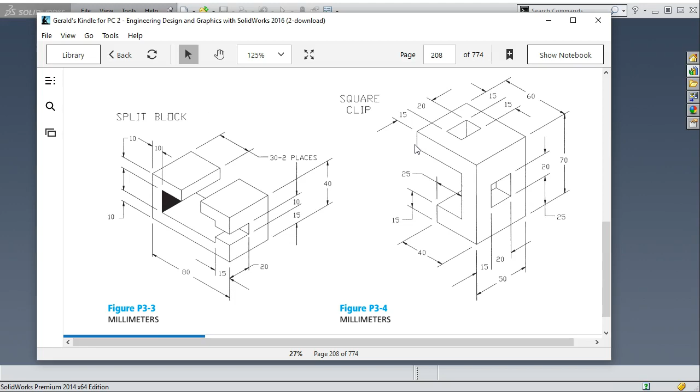So the thing with the thin features, we just want to make sure that we're consistent because we're not going to be able to change these wall thicknesses. If I need a wall to have a different dimension, then I'm going to have to draw that whole profile. Kind of the same with the offset if we were closing that in.

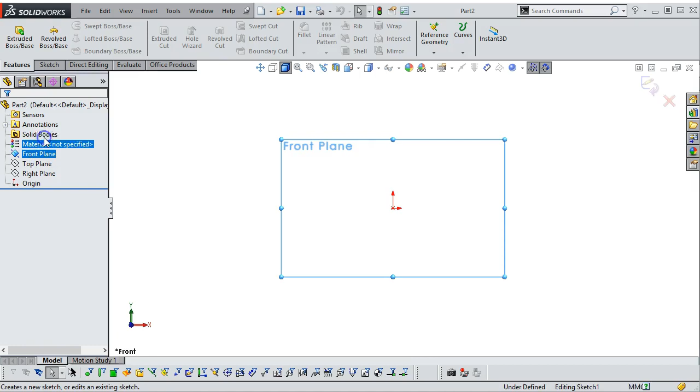All right, so this one's in millimeters, kind of hoping that we would have a mix of inch and millimeter. So this one can be back in the front plane. And then my sketch up and over.

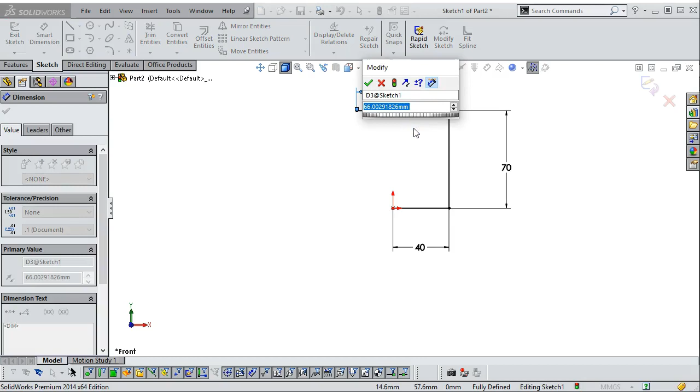So we have 40 millimeters on the lower leg, 70 millimeters on the height, and then 60 millimeters on the overall. We're going to extrude, and thickness, actually the width of the part is 50 millimeters.

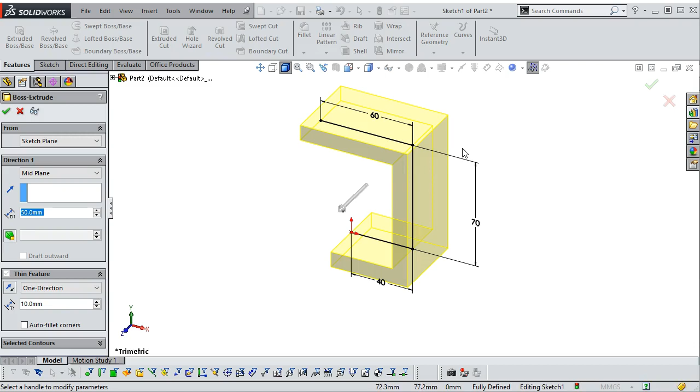And since we're doing end conditions, let's go with a mid-plane end condition. That will put 25 millimeters forward of the front plane and 25 millimeters to the rear of the front plane.

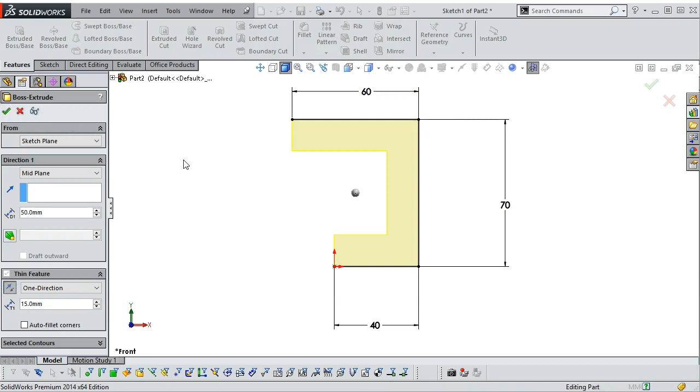Alright, and then 15 millimeters on the thickness, and we need to make sure it's going the right way, so this is growing outwards. That means I need to toggle my direction so that it makes the cut to the interior. We'll go ahead and hit OK.

And then sketch. Alright, so 25 and 20, half of 20 would be 35. And 15 and 10 would be 25, so that says that this is going to be centered. So I'm going to do a Control 8 normal to.

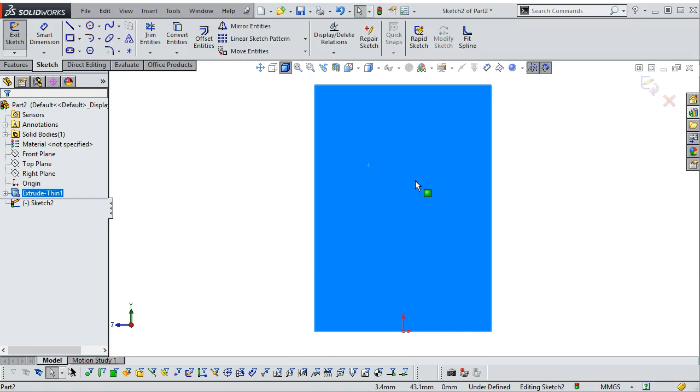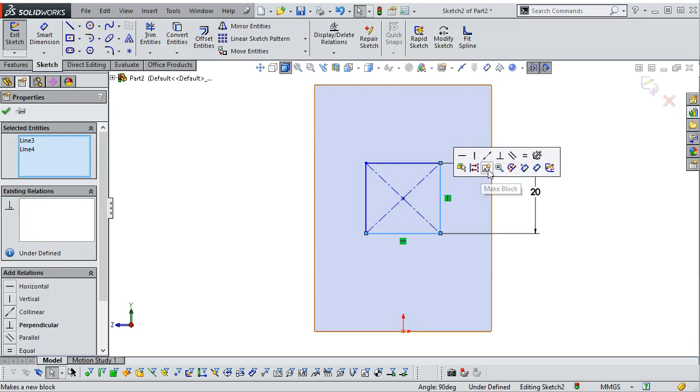We're in the sketch, and we have the center rectangle, and the rectangle is 20 by 20. Alright, and then if my design intent is that this rectangle will always be 20 by 20, then I'm going to set those to equal.

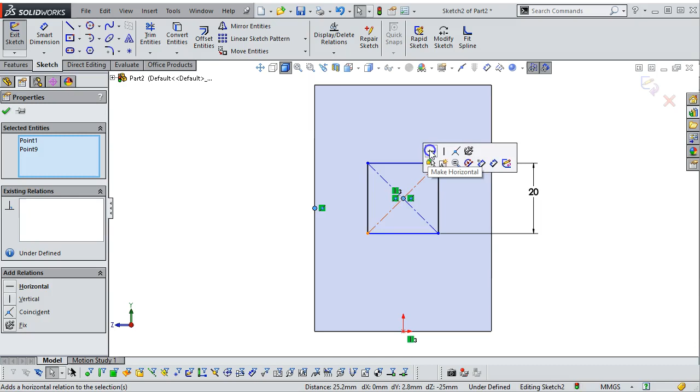Since I have the origin, one of the advantages of setting the midplane is that I can pick the origin and the center point of my center rectangle, and the origin are vertical. And then selecting the midpoint along one of the edges, and the center point of the rectangle can be horizontal.

And then we will extrude cut. This one, there's nothing to terminate, so through all. The top may just miss, but it'll be something that we want to verify.

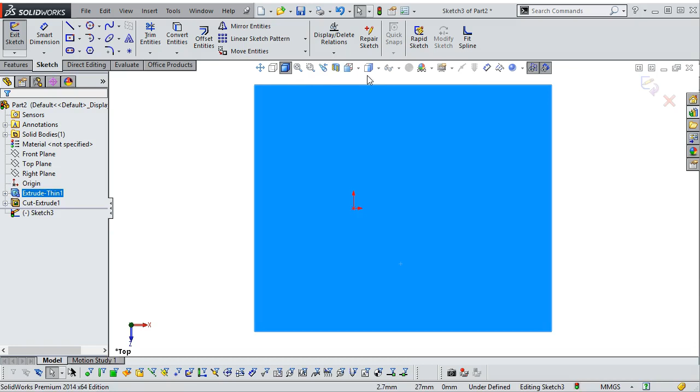All right, so if we go back to our views and go to the hidden lines visible, I think I'll stay with the center rectangle. And we do have a dimension, but 15 and 20 and 20 by 15 for our length, so we can't use the equal for the sides.

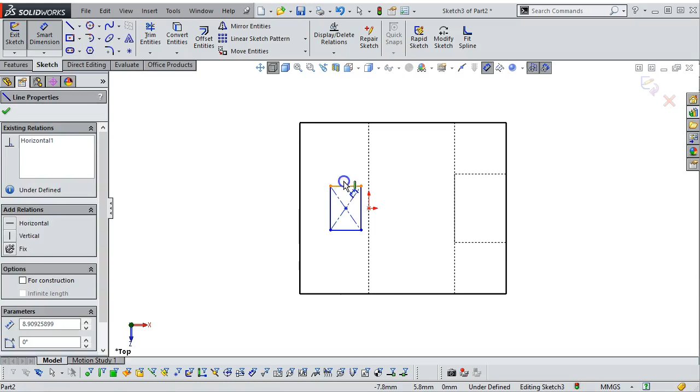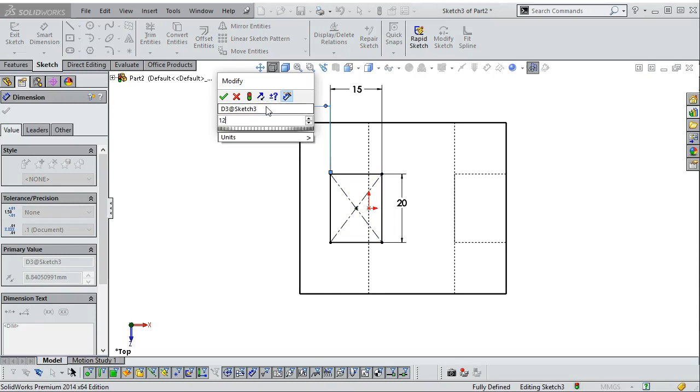But I can still use the origin and the center of my rectangle for horizontal, and then all I have to do is position it along that face. Alright, so that has a distance of 15. Alright, and doing that, it's not quite.

We have just a little bit of a gap, and would be interested in seeing that. Let's see, 40 back from 60 should be 20. That doesn't quite look like 5 millimeters, but oh, that would be it. 15. Okay, so we still have overlap.

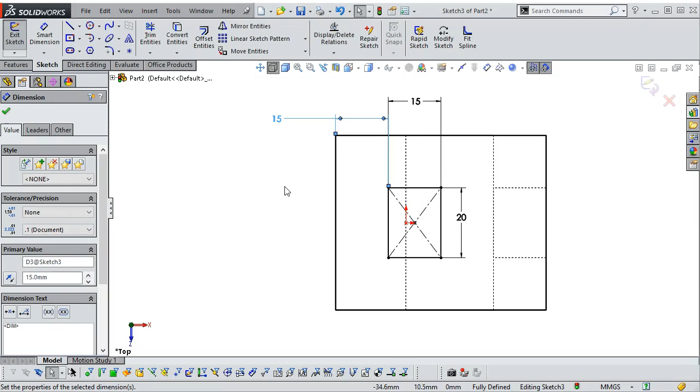And I say if something looks strange, then it's time to stop and check it out and figure out what's going on. But based on that, if I was to do through all, it would notch into the lower leg. So let's take a look at through all, and you can see from the preview the material that it's going to remove. Last time we did up to next, so let's do an up to surface.

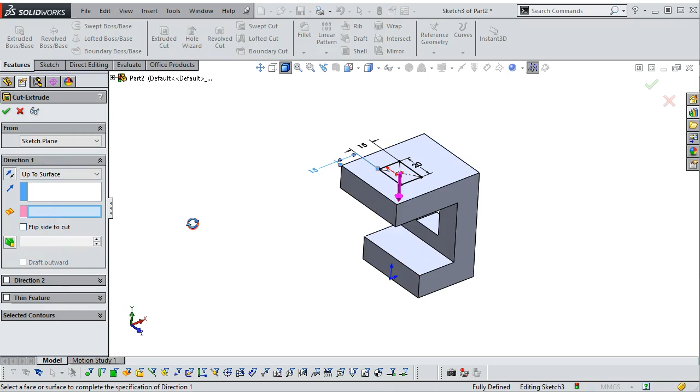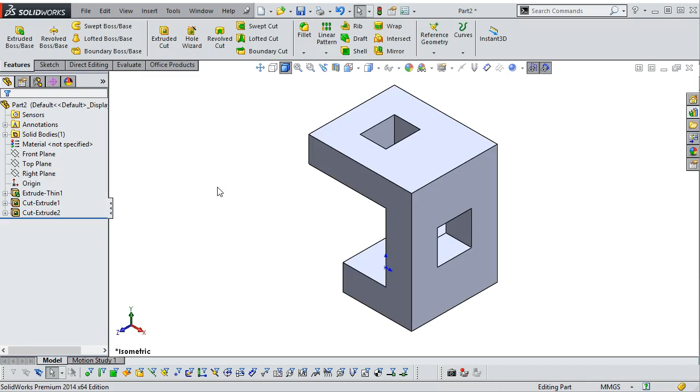Alright, so up to surface has the advantage that if this had curvature or we were trying to generate some more complex geometry, it would follow that surface as well as what it's doing with the planar surface. Alright, so save, and we're on to the next.